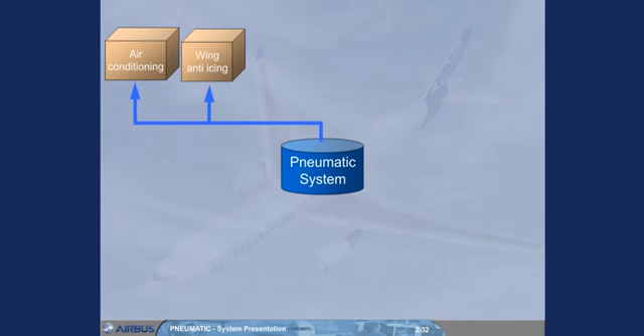The A330 pneumatic system supplies high-pressure air for air conditioning, wing anti-icing, water pressurization, hydraulic reservoir pressurization, engine starting, pack bay ventilation, and turbofan actuation.

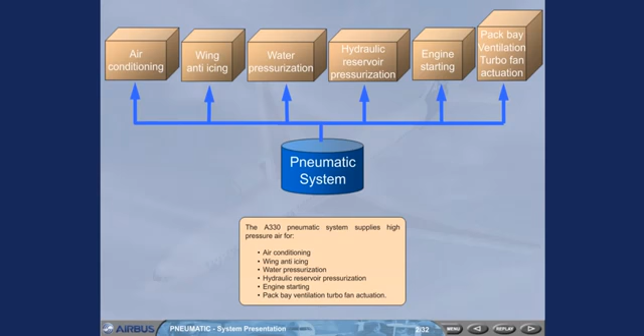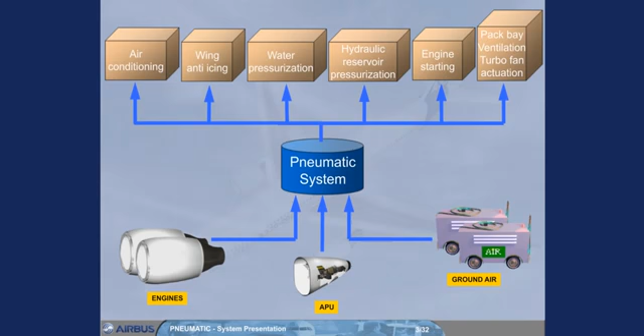High-pressure air can be supplied from three kinds of sources: the engine bleed system, the APU, and two external high-pressure ground power units. Note: wing anti-icing is not permitted when the pneumatic system is supplied by the APU bleed.

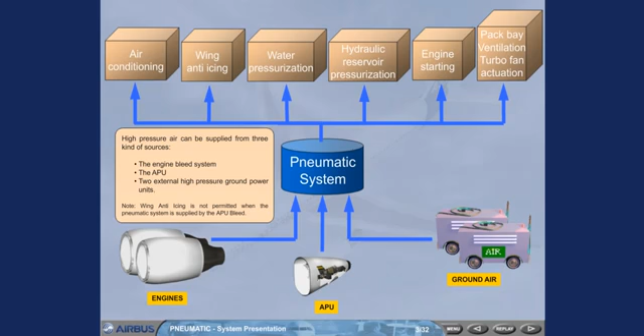The pneumatic system is controlled and monitored by two bleed monitoring computers, BMCs. There is one BMC for each engine bleed system. Both BMCs are interconnected, and if one fails, the other takes over most of its functions.

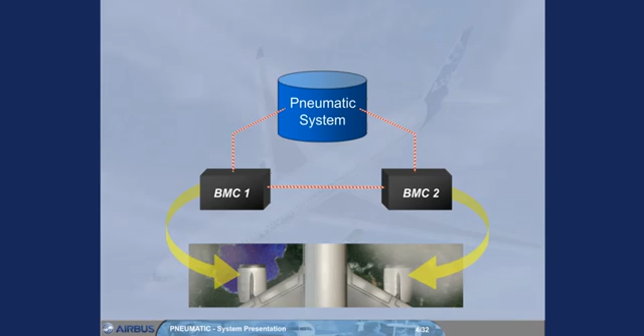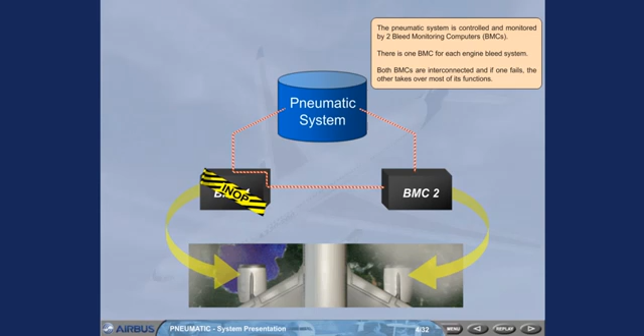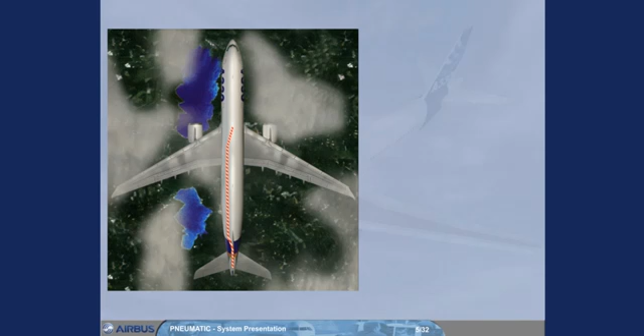An ambient overheat in the vicinity of the hot air ducts in the fuselage, wings, and pylons will be detected by air leakage detection loops. If a leak is detected, a signal is sent to the BMCs, which automatically isolate the affected area.

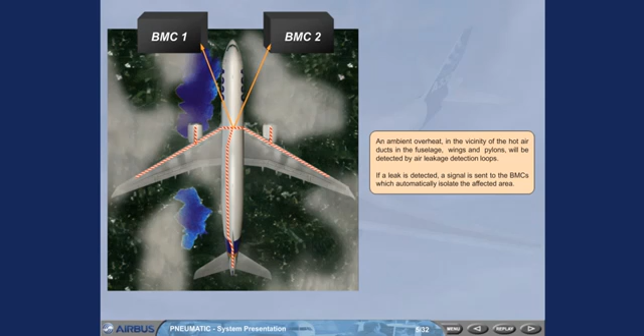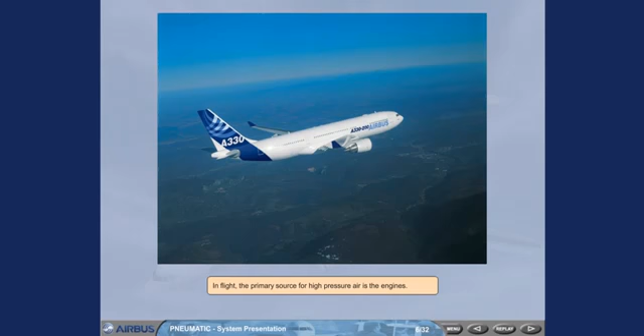In flight, the primary source for high-pressure air is the engines. Air is bled from two compressor stages of the engine: the intermediate pressure, IP port, and the high pressure, HP port.

There's an HP valve, which can cut off bleed air from the HP port. It is automatically controlled by the system and will limit the downstream pressure. Note: there is a non-return valve at the IP to protect the compressor against a reverse flow from the HP.

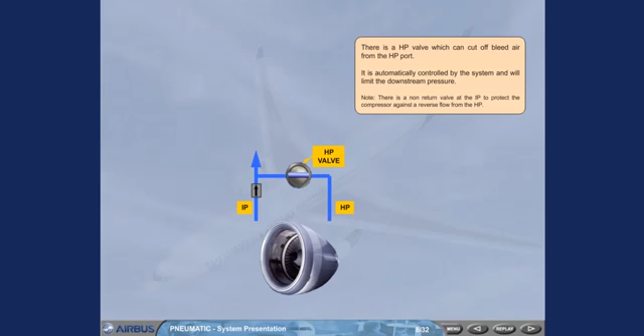The high-pressure section, HP, is only used when there is insufficient pressure from the intermediate pressure output, IP, due to low engine compressor speed. Once the engine compressor speed is high enough, the IP is sufficient and the HP valve closes.

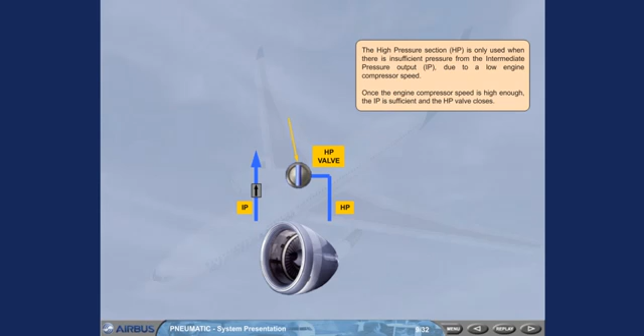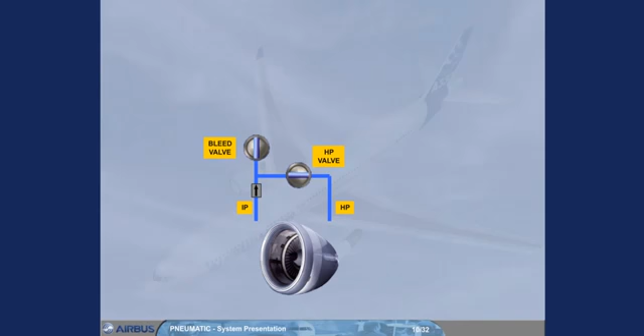The air extracted from the IP or HP stage of the compressor then goes to a bleed valve, which acts as a shutoff and pressure regulating valve.

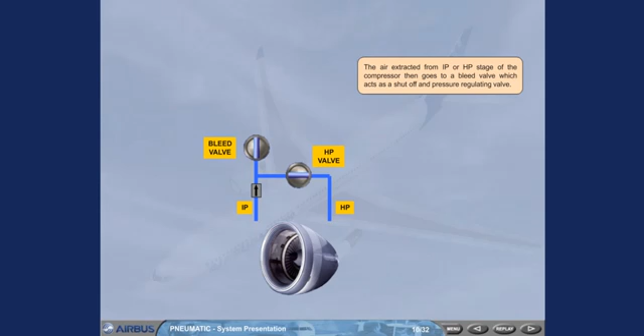Since the temperature of the bleed air is high, it passes through a precooler before being distributed to the users. The precooler heat exchanger uses cooling air, bled from the engine fan, to regulate the temperature according to the demand. Note: an overpressure valve, OPV, will automatically close in case of a pressure regulation problem.

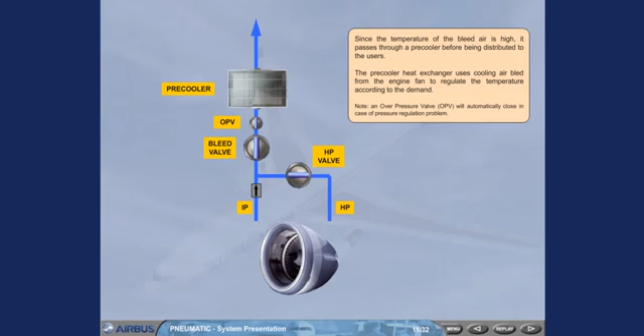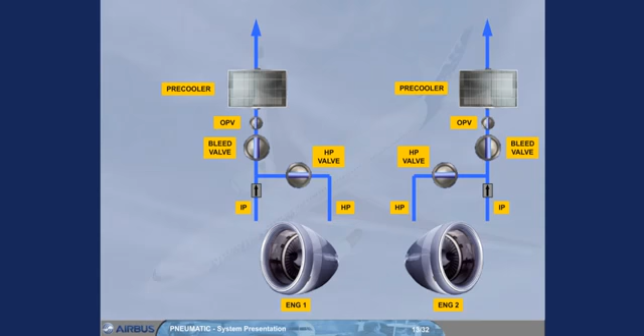Engine 2 has an identical bleed system. Both systems are connected by a crossbleed duct. A crossbleed valve permits their interconnection or isolation.

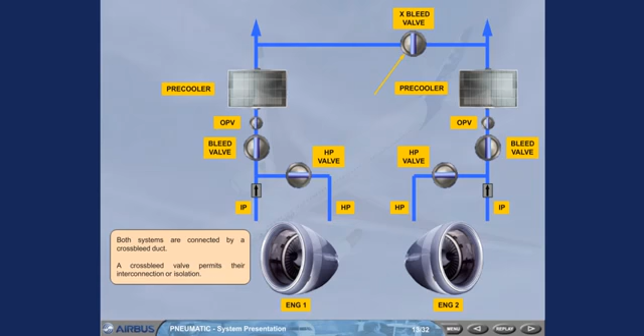The APU can also be used for bleed air supply. This is usually done on the ground for air conditioning and for engine start. However, APU bleed air is also available in flight.

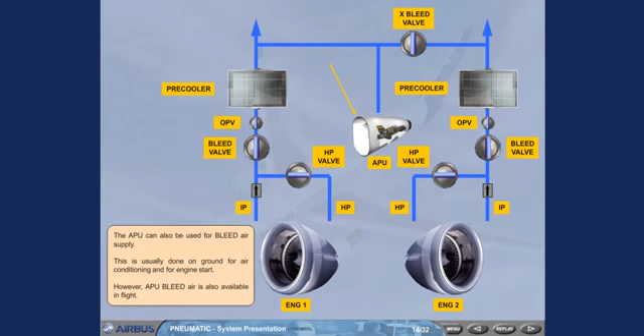APU bleed air is controlled by the APU bleed valve, which operates as a shut-off valve and will be kept open by the electronic control box, ECB, as long as the altitude is lower than 25,000 feet when climbing or 23,000 feet when descending. Note: a non-return valve protects the APU compressor against a reverse flow from another supply source.

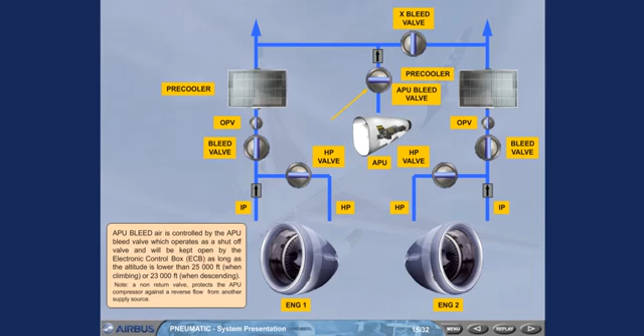Should the APU not be available, two high-pressure ground power units can be connected.

This completes the pneumatic system. We will now show you how system information is displayed to the pilots.

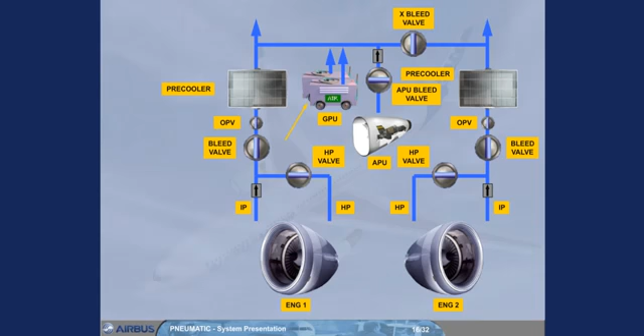Information on the pneumatic system is displayed on the lower part of the ECAM bleed page. Note: we have shaded the upper part of the ECAM bleed page because it is related to the air conditioning chapter. This will be covered in a later module.

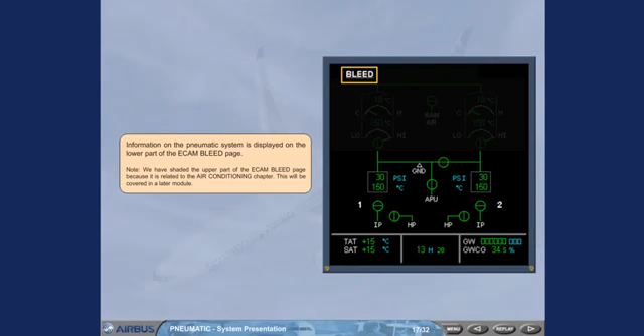Let's identify the system components on the ECAM page now: the IP and HP ports, the HP valves, the engine bleed valves, the precoolers, and the APU bleed valve, shown only when APU is running.

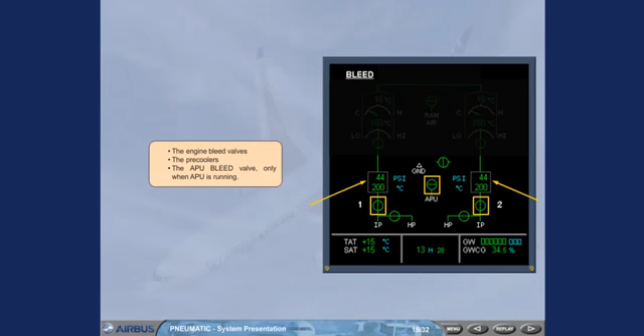The cross bleed valve, and the high pressure ground indication, always displayed on ground even if the ground unit is not connected.

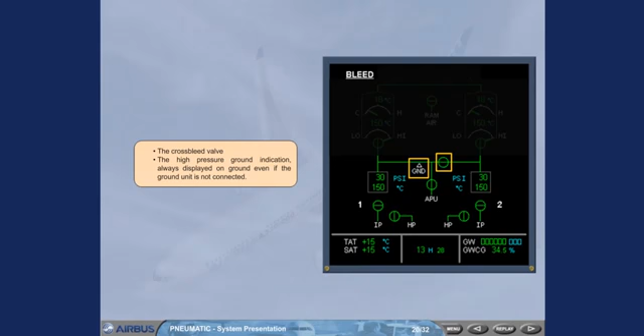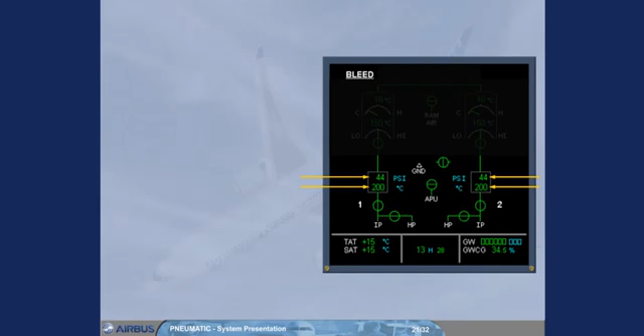The following information is also displayed: precooler inlet air pressure, precooler outlet air temperature, and engine identification numbers.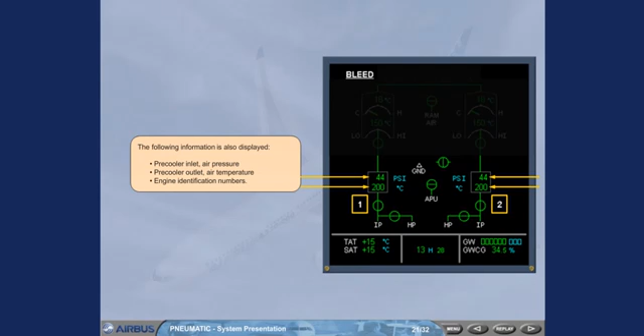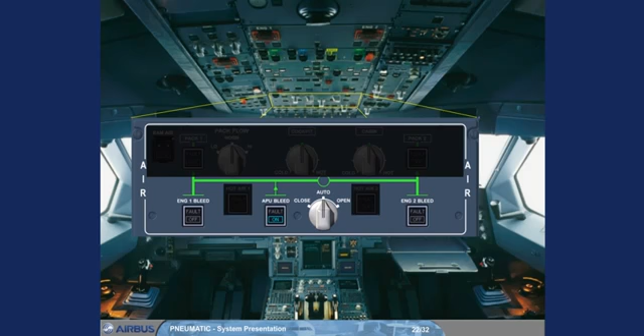Controls for the pneumatic system are part of the air panel, located on the overhead panel. Again, we have shaded those controls which belong to the air conditioning chapter.

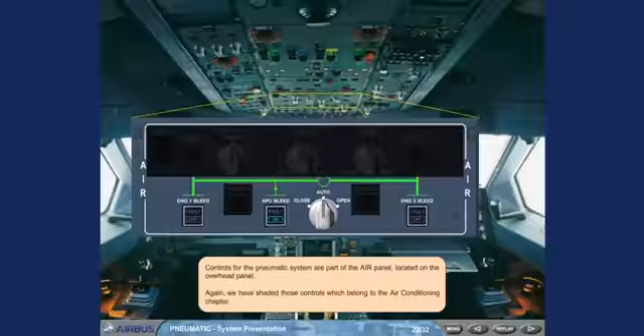Each engine bleed valve is controlled by a push-button switch on the air panel. The APU bleed valve is controlled by its associated push-button switch.

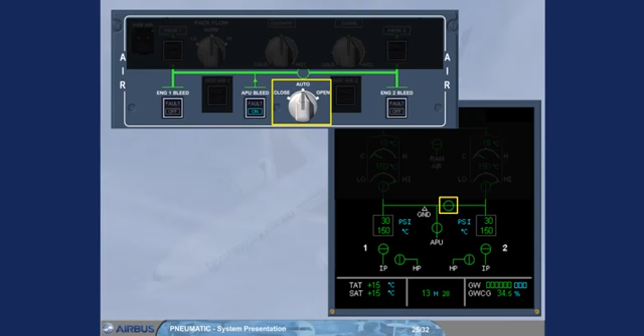The crossbleed selector enables the pilot to open and close the crossbleed valve manually, or to let the system operate the crossbleed valve automatically.

Usually, the APU bleed air is used to start the engines. The APU is connected to the bleed system. You are ready for engine start.

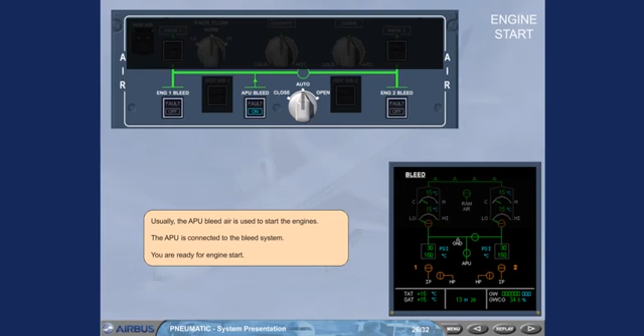Notice that the engine identification numbers have turned white, indicating that the engines are running. The engine bleed valves remain closed because the APU bleed valve is open and the APU has priority over the engine bleed. We can now switch the APU bleed off.

Observe the ECAM: the APU bleed valve is closed, and the cross bleed valve is automatically closed. It is displayed amber during transit, and the engine bleed valves and HP valves are displayed in line green because they have been automatically opened.

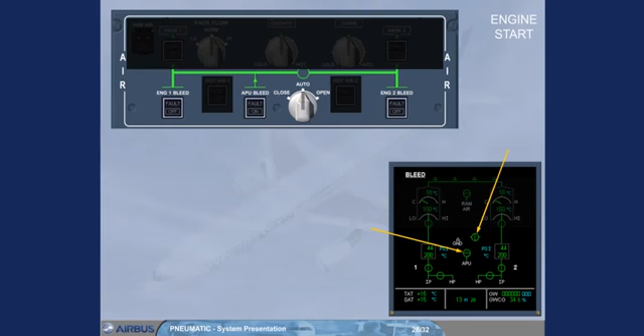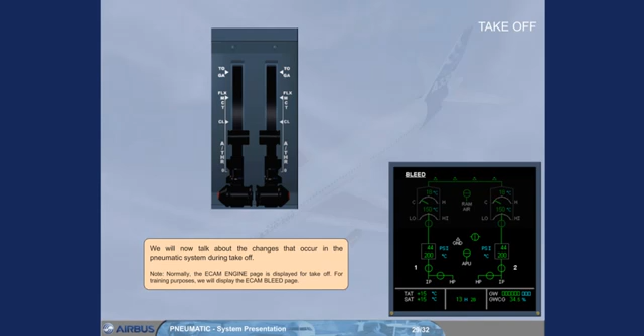We will now talk about the changes that occur in the pneumatic system during takeoff. Note: normally, the ECAM engine page is displayed for takeoff. For training purposes, we will display the ECAM bleed page.

As engine thrust is increased, the pressure delivered from the intermediate pressure stages is sufficient, and the high pressure valves are automatically closed accordingly.

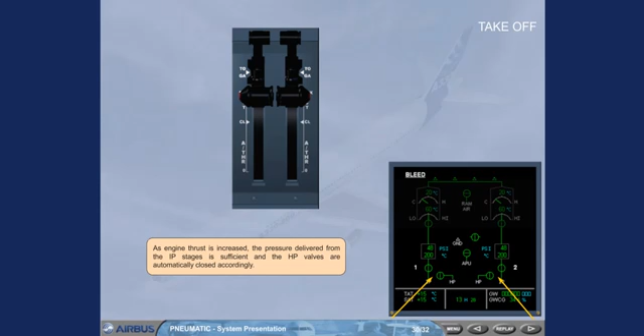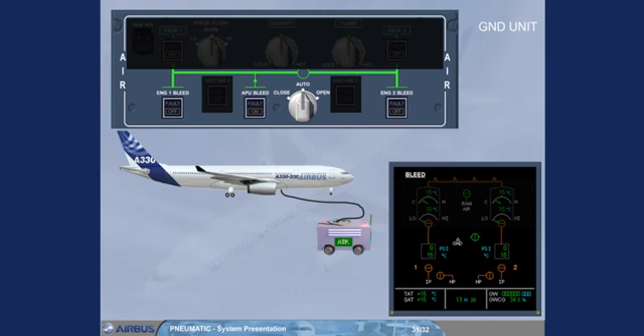If the APU is inoperative for bleed air supply, the two HP connections of the ground air unit can be connected to provide pneumatic pressure for engine start. The ground unit delivered air, pressure and temperature are indicated on the ECAM.

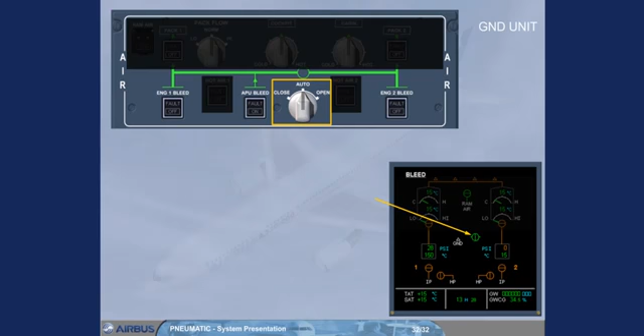Notice that in this case, the crossbleed valve remains closed with the crossbleed selector in auto position. In order to start engine 2 first, you have to set the crossbleed selector manually to open. This is done according to the procedure in your FCOM.